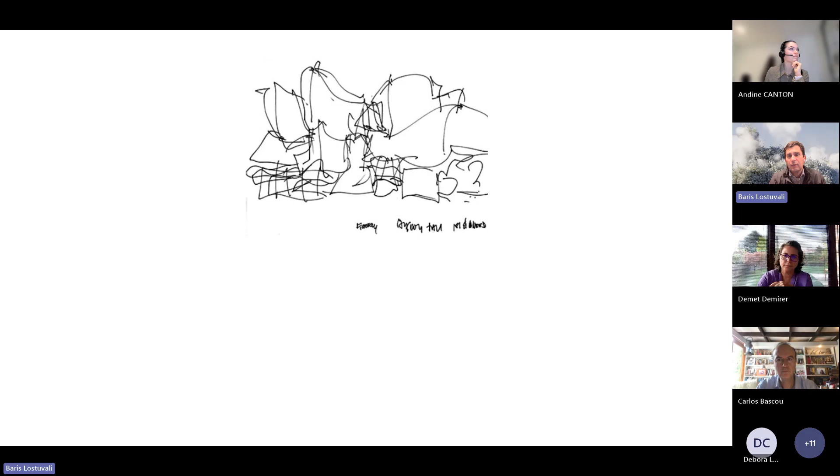So with that, let's just take a look at construction and architecture and engineering. The way I see it, it all starts with a simple idea. We have a client, the client wants to do something, and we have wonderful, talented designers take the idea and turn it into something - it could look like a sketch on the back of a napkin, and we start working with it. We, the contractors, we, the engineers, start working with the architects.

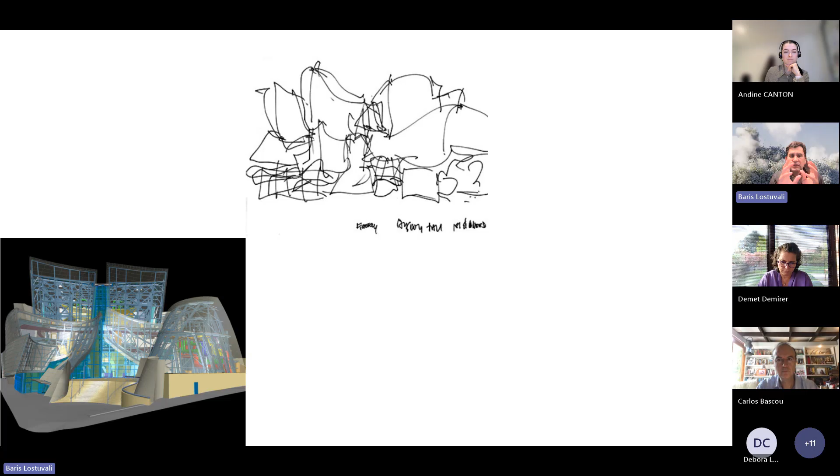Then we start modeling these things. We're like, okay, if that's the idea, how does it look, and how can we start engineering these ideas? And then we take it to the field. In the construction side, we start assembling all those things. And at the end of the day, that idea of a client becomes real.

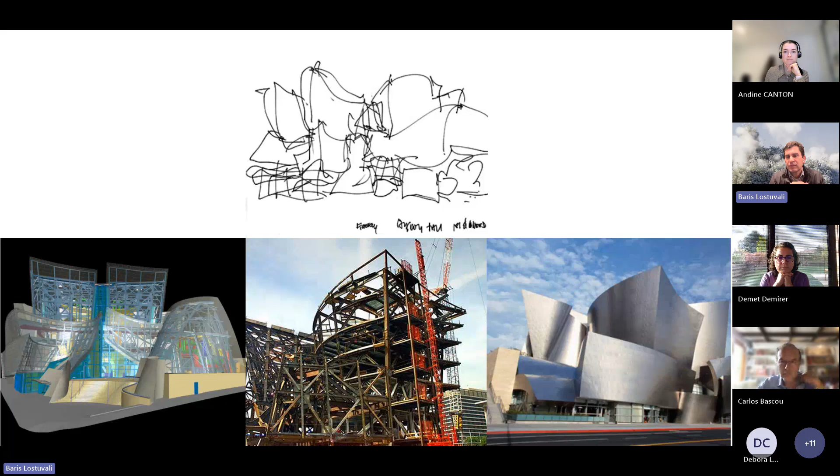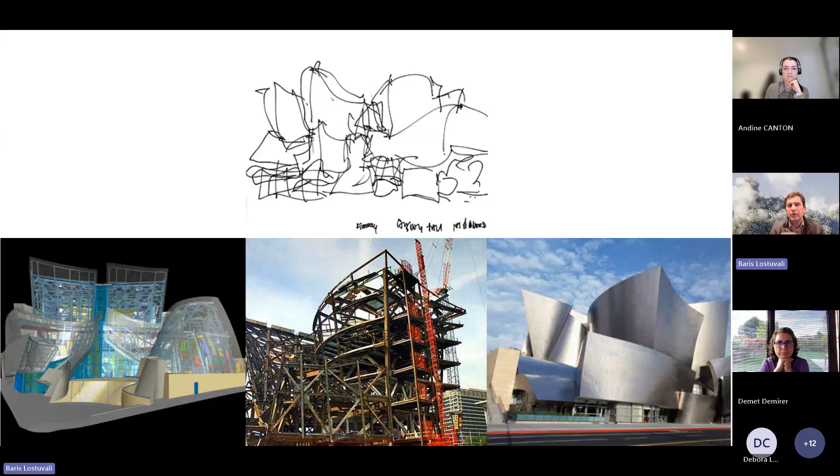It's a fascinating process. It is the intersection of fabrication, intersection of architecture, technology, construction. So it's a very unique industry that we work at. We touch on so many different things.

As much as we're busy building these amazing buildings, the way we do things hasn't changed that much. I've been in the business for close to 30 years now, and I was lucky. I think I'm one of the lucky ones that have seen some real good change. But in large, we're still doing things the very old way. So, and there are the good things.

There are better ways, different ways of doing business, and hopefully they're coming more and more into what we do. But I think that was going to require very intentional change. If you're a client, a contractor, an architect, you have to intentionally choose to go a different route, and there are growing trends.

What I mean with that is, if you look at the Bay Area, you have this amazing, innovative culture of Silicon Valley, right? All these firms just came from nowhere with the internet. That bubble just popped right there like 20, 25 years ago, and that gave a lot of innovation, new ideas to the area in general.

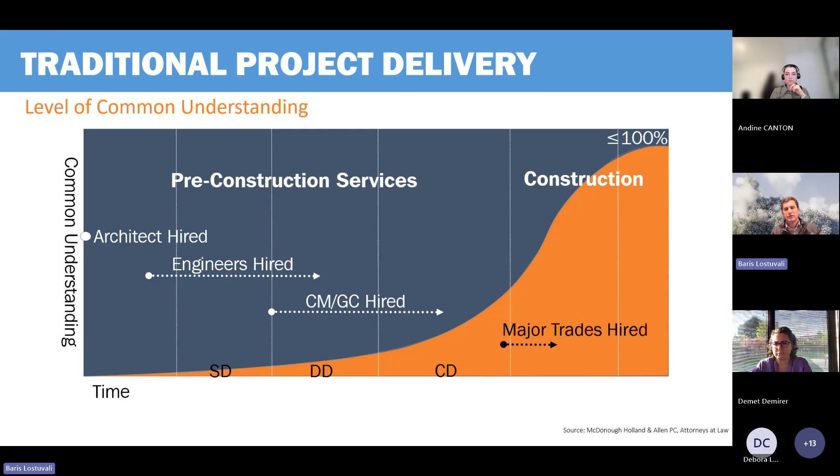So again, that's how we call integrated. If I go back in the days, the left side is just more like silo, A, B, C, D kind of a thing. It's very sequential, and you leave so many gaps, you don't collaborate. But with IPD, you bring a huge wave of knowledge, collaboration, integration to this thing.

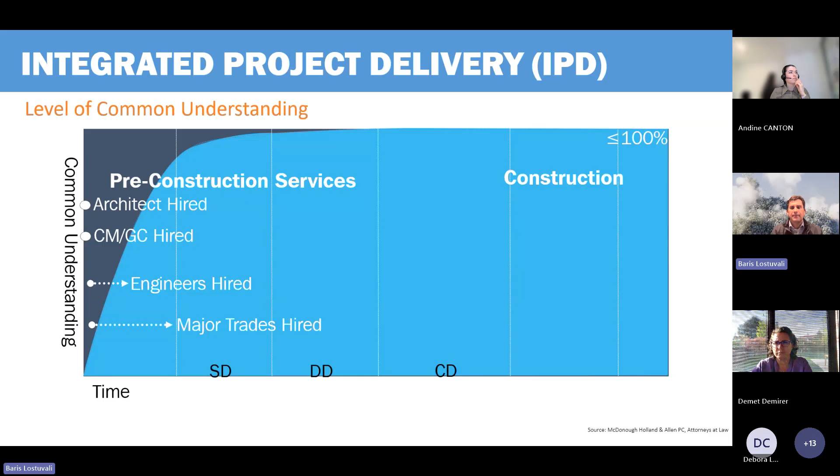So when we look at what has really changed with the IPD delivery, we changed the way we're approaching the processes, how we are collaborating, how we're practicing, number one. And I'll give you details of all this. Another very important change is how we are sharing risk. Construction design is a highly risky environment. We love to shift our risk to other partners. So in this environment, how are we sharing risk? I think that's another thing we changed.

Information infrastructure: with BIM, building information modeling, virtual design construction, that has completely changed the information infrastructure as well. When you start working together, you also change how you communicate, transparency, and the metrics you develop, how we're sharing our knowledge. And the role of a leader is quite different now, and the leadership.

Obviously, modeling BIM is part of that, focusing on the entire system for the client, not just one part. That's something we learned from the Toyota manufacturing system and lean construction systems: what is the customer value, and are we really meeting that customer value at every step of the way? So those are the things that start changing the way we do business.

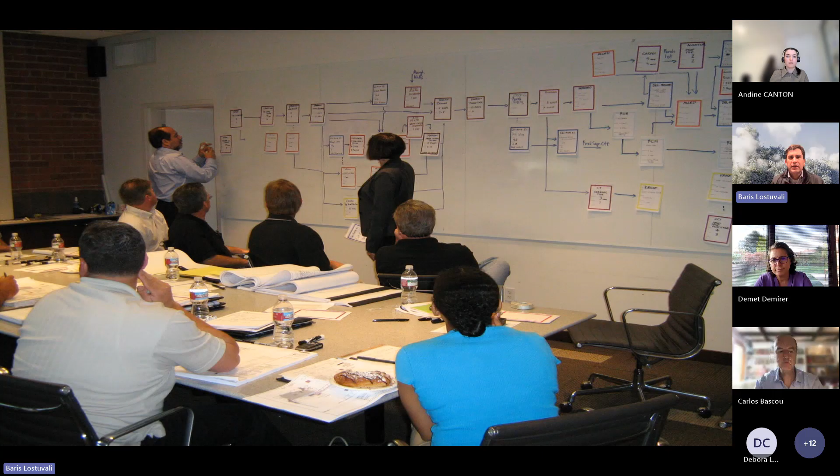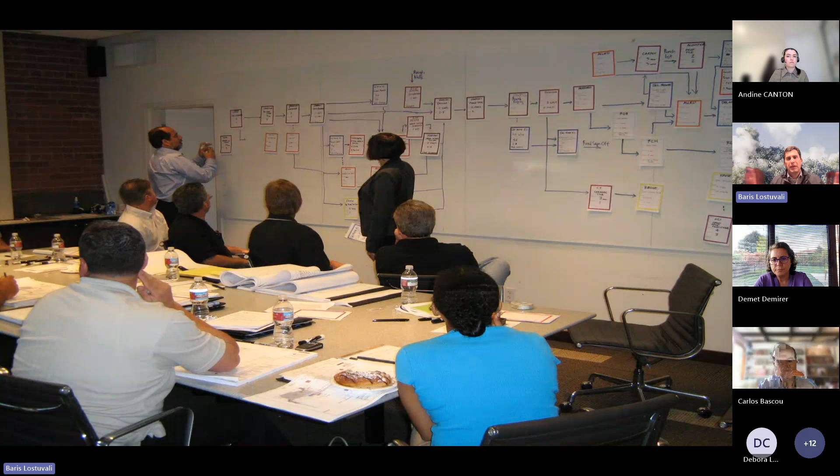Here's a good example of how we're bringing teams together. Remember, on the left side it was more ABC; now we're bringing all the teams together. This is a session of working with the architect, engineers, and contractors, what we call process mapping. We start designing, or figure out how we're going to design, and ask: who's going to do what, what are you going to need, when are you going to need it, how many people? This is one way of getting the conversation going.

Visualizing, so people have a clear image as a team. It's a very complex process—if you see all the arrows, there's a lot there. Again, bringing people together, having them express what they need in a team environment. All these things are very different now.

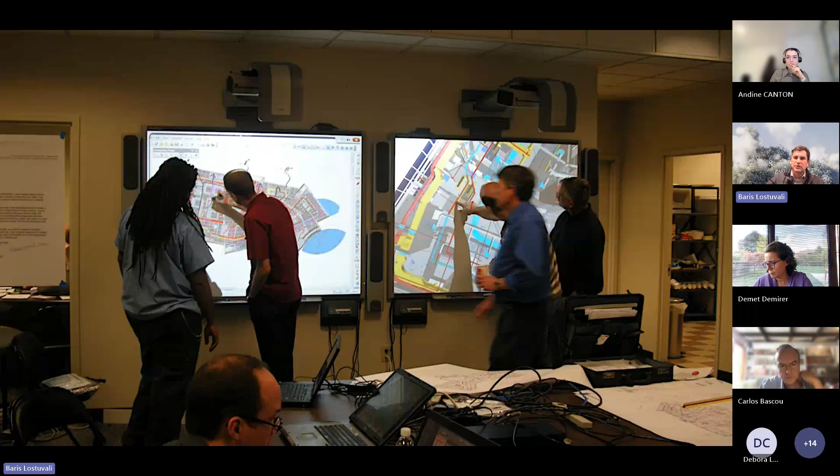Here's another example: when we work in what we call the big rooms. Big rooms are where the project teams—architect, engineers, contractors, and the client—are all operating in one big area. It could be a group of 20 or 50 people; I worked in 100-person big rooms. We have big screens, building information models, and those process map sessions.

So it's a highly dynamic, fluid space. Here's another one, what we call a pull planning session. On the left side, my superintendent was up creating the pull plan to understand the flow of information. On the right side, we're using the building information models to really dive in and understand, and this all syncs up.

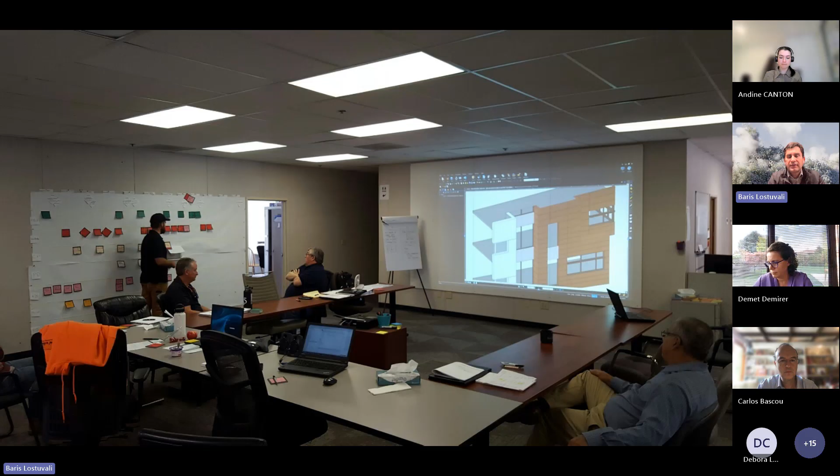That's another session—it's really a different way of assembling teams and putting them in motion. This is another one I really like: a picture of the construction team early in the morning, probably a 6:30 or 7 a.m. meeting, getting ready for a daily huddle.

That's another term—the people come together before they start on site. They look at their daily work plan, have a discussion, and if they need certain things or there are constraints, they discuss them. One conversation, one space, one mission—we're working together.

I love this photo too: the construction people, the foreman, leading the meetings, asking what do you need. It's highly visual—not just a critical path CPM, P6 schedule where things are so difficult to follow. It's a highly granular, highly visual conversation, where everybody is present, participates, and collaborates.

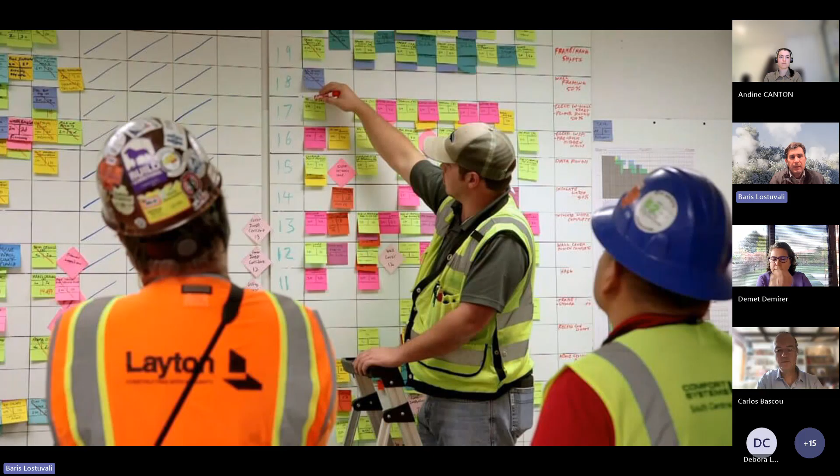This has been going on in the United States for a good 10 to 15 years now. As a matter of fact, next week I'll be going to the Lean Construction Institute Congress in Texas, where they're expecting over 2,000 people from all over the nation, actually all over the globe. It's been a major growing trend—I'd highly recommend you check out the Lean Construction Institute, LCI. The conference is next week.

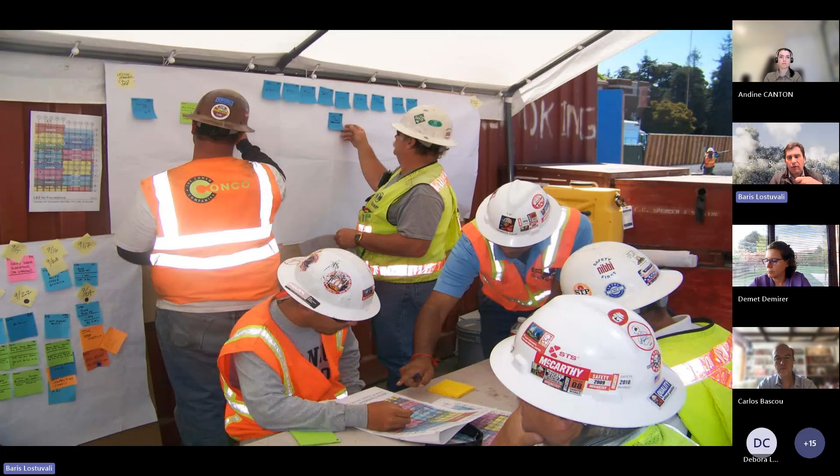Another example: construction people—not just architects, engineers, and the rest—coming together to visualize things, understand the flow and handoffs. Part of that is the foundational level, really looking at things differently.

When we started this journey in the Bay Area, we were heavily influenced by the software tech industry—Demet knows Scrum really well, and it's had a big influence on construction. Another big influence is Toyota car manufacturing; they have a wonderful book called The Toyota Way. During lunch or at other times, we'd meet and read these books as a group so we could better understand how to apply that knowledge to construction. That's something we've done over the years.

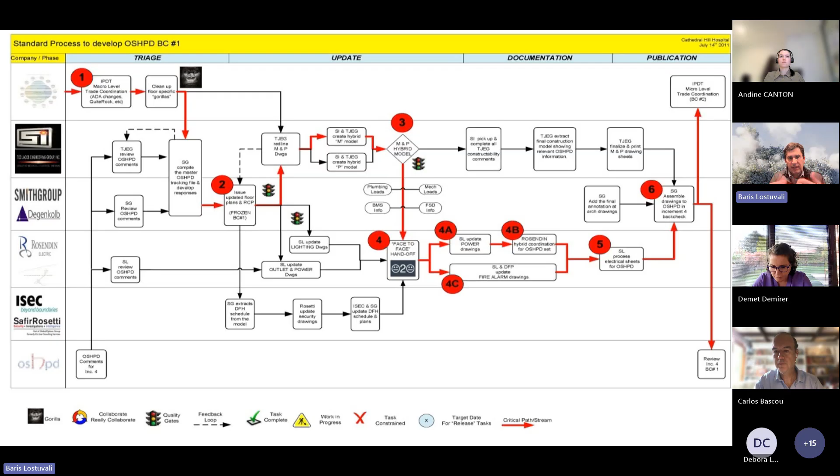Part of that, we start creating these process maps, or value stream mapping, or swim lane diagrams, where we look at the complexity and understand, bring some structure, bring some order and understanding, so we share information better. These are just examples. This is something we never done before in this delivery method.

The things I described the last few minutes is really about bringing people together, and how we process information in the value stream mapping in the big room. So it's very crucial. However, the third part of the stool is very important, which is technology. The things happening in construction, on the planet, is so significant we cannot ignore it, and we need to bring it to what we do.

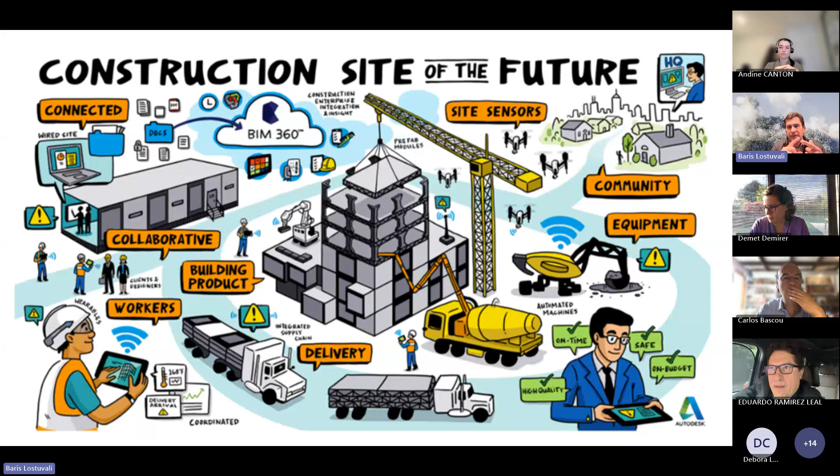So this is a nice little cartoon visual about the construction site of the future. We use a lot of technology on construction sites, a lot of software to create just-in-time delivery methods, bringing the right information to the site. Because construction sites are so busy and so expensive to maintain, the timing of delivery of anything - material, labor, equipment - is so crucial. So we're using all these technologies I'm going to show you.

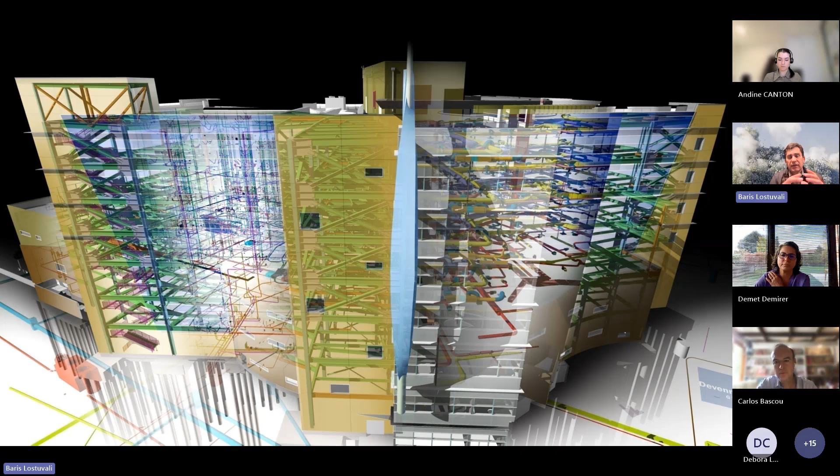The phrase we use is we like to build the building twice, not once. First one is virtually, and second one physically. We like to build the model. This is a really good image showing, with this building information modeling, we now have the ability to see anything and everything that goes into the building. So we can really start managing the information flow. Now we're there because of the technology.

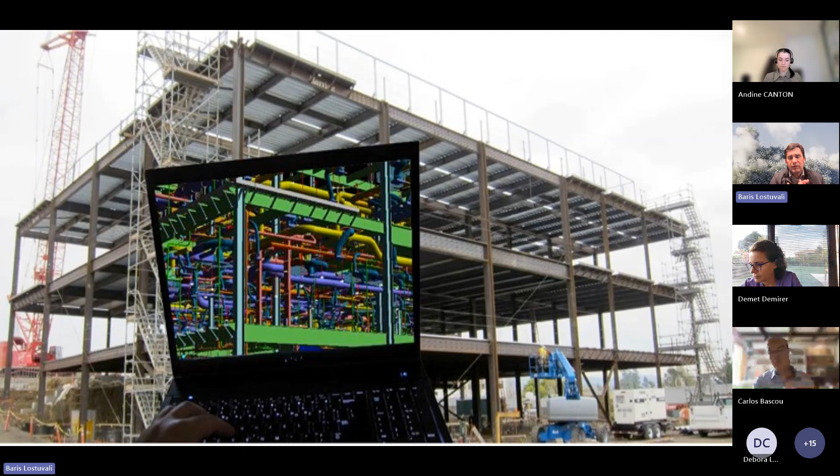Now with all the different gadgets, we can do augmented reality. The construction crews have a better understanding - okay, this was standing, what's going to come up. And there's so much more coming for us. Again, like I said, us being almost like 20 kilometers away from Silicon Valley gives us a tremendous opportunity to interact with these startup firms.

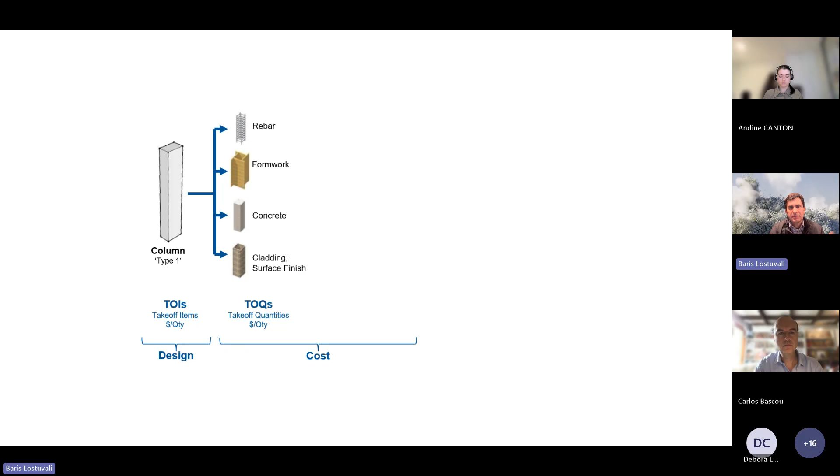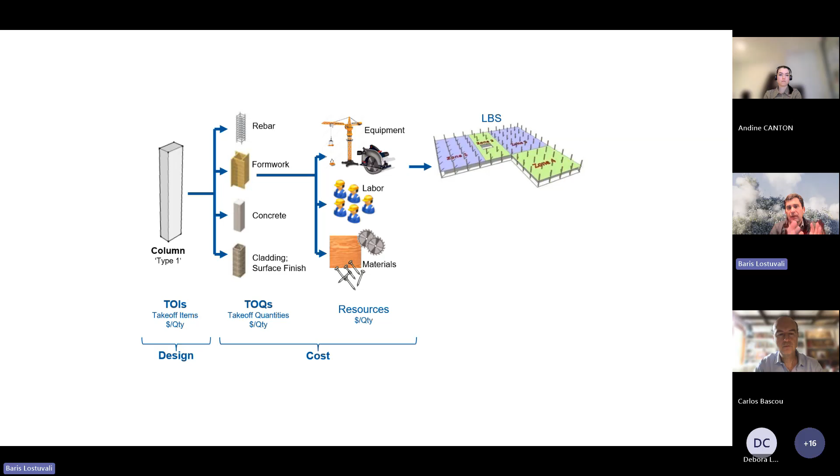And now we can see the column - how the column is made up with the rebar, formwork, concrete. Now we can also start turning into cost. We have a much better ability to put a good price to anything because of this information modeling and the elements we can really drill deeper into. And then after we have a good cost that we can inform the client, we can start turning into schedules. We can plan the job better, and all the good things, thanks to technology.

I think where we are is, there's definitely a piece of innovation - innovation being doing the same things a bit better. But I think there's another piece of the scale, which is disruption - making things that make the old things obsolete, so doing new things. In this era, there's a lot of innovation I see, but there's also a lot of disruption and bigger change, and I think AI is going to bring a lot more disruption to construction.

Hard to replace construction labor, but if you come to San Francisco today, as I'm driving, I see so many self-driving cars - at least 20 or 30 in a 10-minute time frame. So all these technologies exist right now, and you can only imagine what it's going to do to the construction field in 5 years, 10 years. It's a big change, bigger changes coming - that's what I'm trying to say.